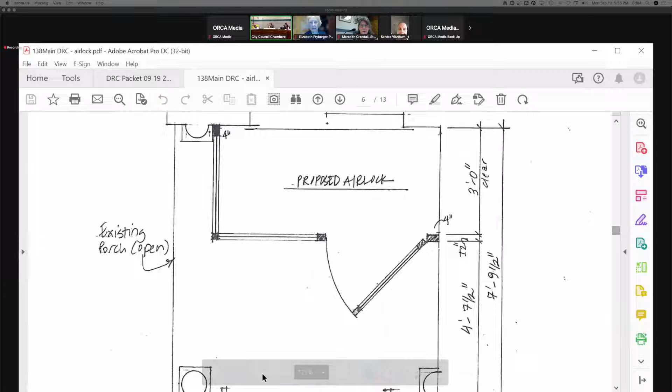Let's zoom out a little. So here's the current, existing historic doors and the whole granite slab here. And then here's where the airlock would be, right, Sandy? Yep, yes. So set back in, away from where the arches are.

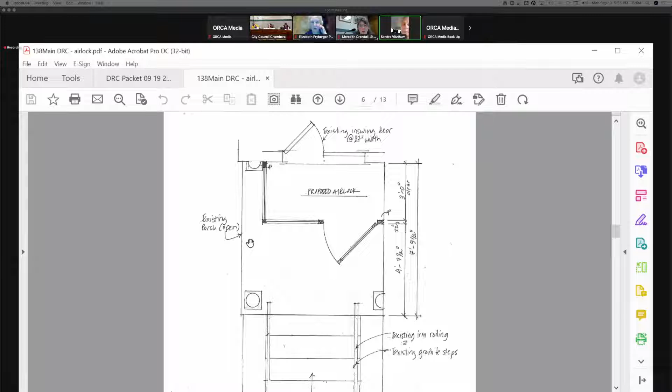And there's multiple anchor points. Well, no, there weren't before. So it's mostly attaching through a channel on the ceiling, which is permanent and black, the same color as the ceiling. And then that's what it looks like. And then it had, see the corner right where that little hand is, there's a corner post that was going to pin down to the floor.

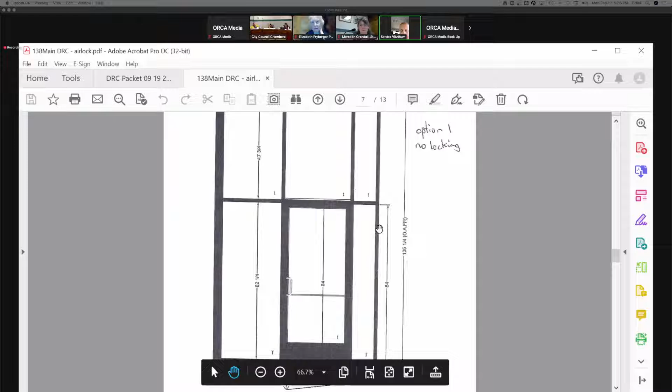And then there were a couple of attachments against the brick walls in the mortar, and that was going to be enough. But if you look at that door, can you go back up, Meredith? So do you see that, Liz?

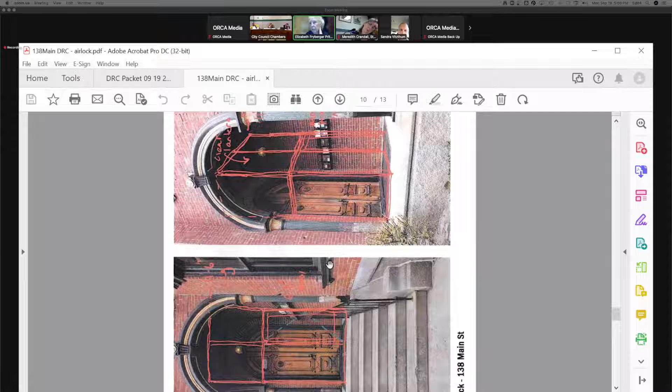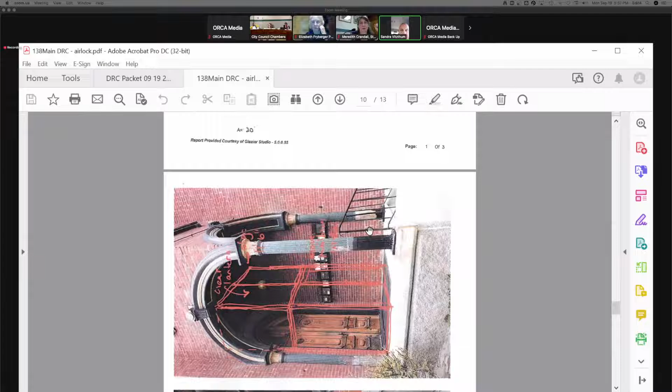Yeah, I do. So in other words, there won't be any holes drilled into the granite slab. I think there will still need to be one. But if you don't mind going back up, Meredith, to the front view. That one with the panic bar.

So you see how there's a thin rail along the bottom, almost all along that length? It cups down, and the center line of the cup is right underneath the handle on the door. So it's just that that is suddenly having to support and reinforce the airlock, and it wasn't designed to do that. Right, okay.

So there's an unanticipated gap here, right? Sandy, where the granite dips down, so that now this whole bar along the bottom here in the middle is carrying the weight versus the granite carrying the weight. Correct. There's a small threshold under the door, but it was going to be - the threshold was going to be an inch off the granite.

If we go with this temporary setup. Well, whether it's temporary or permanent, that inch has to be made up. But the problem is they have to use extra pins, and they have to somehow remove it. And I did find a neoprene gasket that they were willing to look into, but that won't be enough, because that obviously isn't going to take weight, the neoprene gasket. So what they wanted to do was add an aluminum bar that could be scribed to the cup.

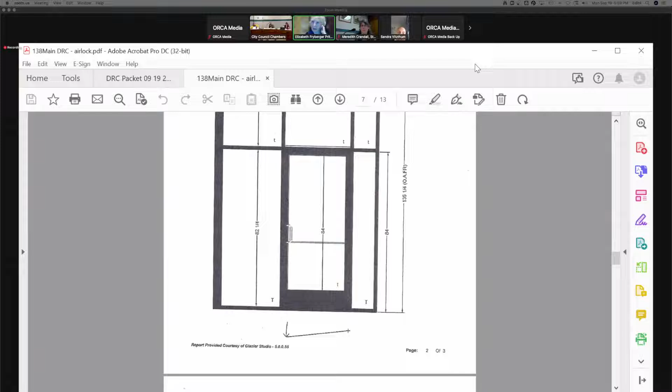For me, the fact that you're proposing it to be permanent now raises some issues that a temporary airlock might not raise. First, you still need to go with a heavier door if you're going to do the locking door. Is that what you planned on? Yeah, they cannot lock the inside door, for a number of reasons. Because that obscures the doors, the original doors on the building.

It does. I mean, partly because it's off center, and the railing, by my calculation, comes right in front of the lock side, right in front of the doors. It does. The doors are wide, they're 5 feet wide. Is there any reason the door - the airlock's made? When it got approved in July, the airlock's already finished.

So I don't think they're going to make it again. I mean, I think the option is to just have the holes in the slab and have it be seasonal, as was agreed upon. So you said the airlock is already fabricated? Yeah, they were starting to put it in.